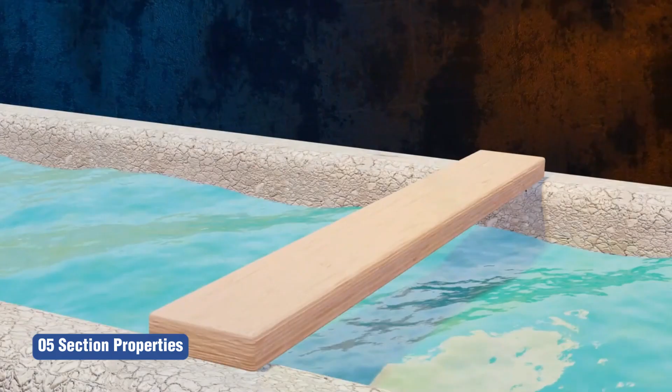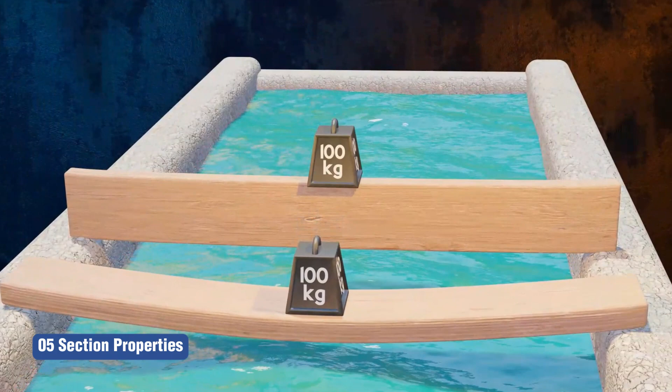When I am bending a beam like this, there's a lot of bending. But if I turn it 90 degrees and try to bend it now, it is not bending. Why is it that the same cross section is bending in one direction but not the other? This is due to second moment of area. In today's lecture, I will talk about second moment of area.

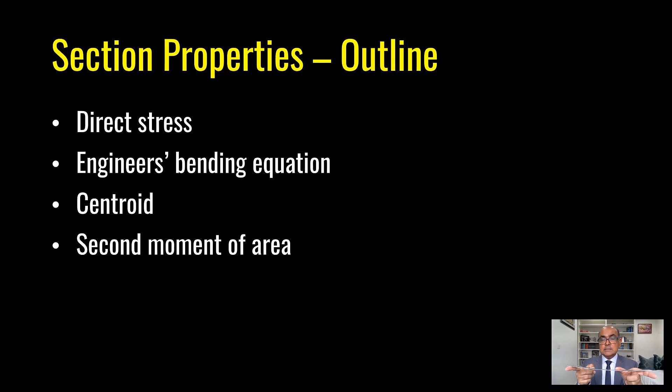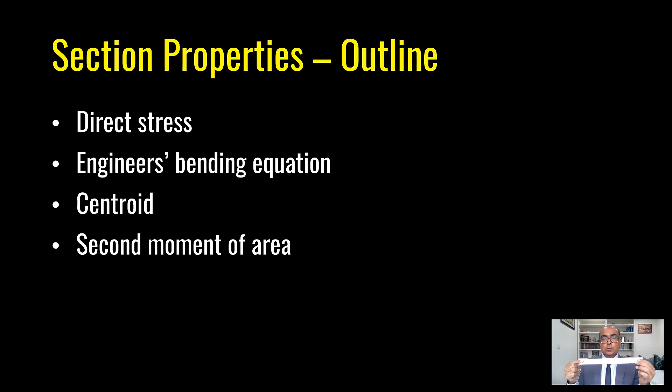If I'm bending a beam like this, in this position, you can see it is bending. But if I turn it 90 degrees and try to bend it, the cross-section is quite stiff. What causes that behavior? This is because of second moment of area.

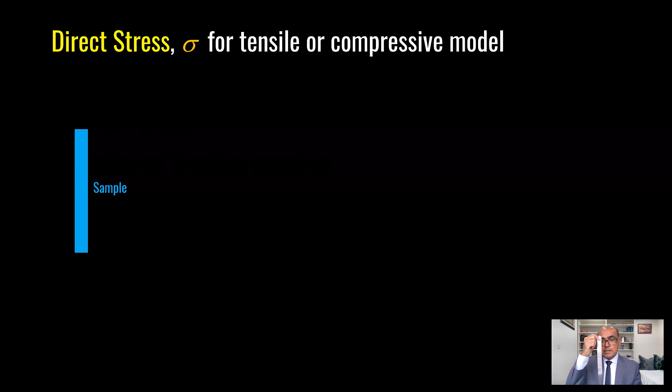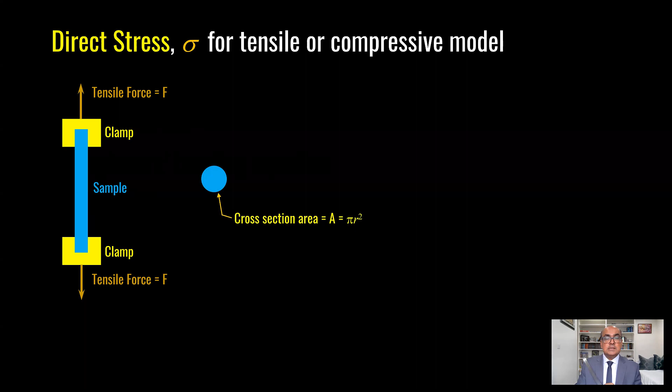First, direct stress for a tensile or compressive model. I have this sample, similar to this one. When you hold a bar or dog bone sample in a tensile testing machine and try to pull it, what happens? It is clamped at top and bottom, then we apply tensile force. This is the cross-sectional area of the bar, so cross-sectional area is pi r squared.

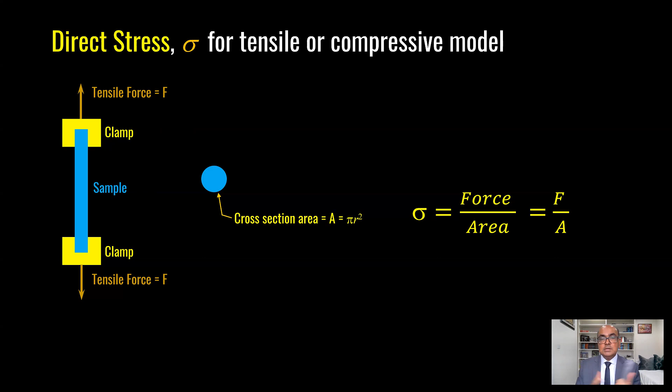Stress is equal to force over area. So whatever force we are applying, if we divide it by area, it will give us stress. If a material can sustain more stress, it means the material is very strong. For example, steel will take more stress, like 275 Newton per millimeter square. Concrete in compression will take about 30 Newton per millimeter square, but in tension it is very weak, taking only about 3 Newton per millimeter square. The unit, as mentioned, is Newton per millimeter square.

Now, how about if I have a beam? If I am bending an element, can I use the same formula, force over area, to find out the stress? The answer is no, because bending behavior is different to applying tension or compression. Most structural members are not subjected to direct tensile or compressive stress; instead, they are subjected to bending stresses.

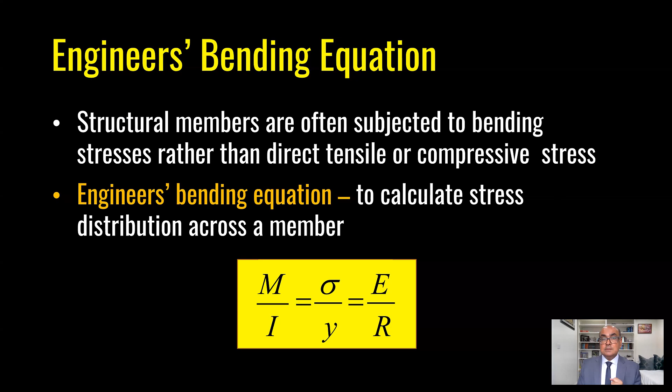The engineer's bending equation is used to work out stress distribution across the member, for the entire depth of the section. This is the flexural formula or engineer's bending equation, one of the single most important equations in civil, structural, and mechanical engineering. If you know this equation, you can pretty much design any system.

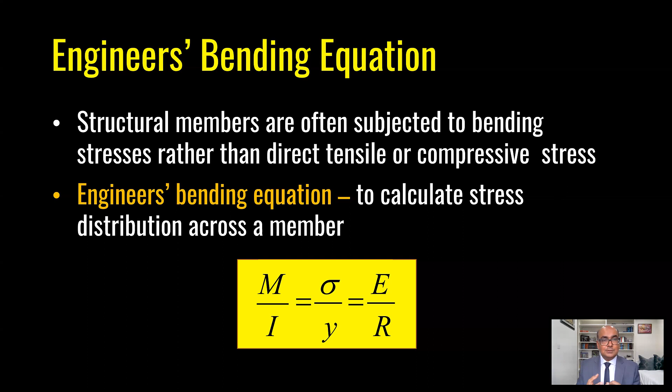It is M over I is equal to sigma over Y is equal to E over R. The question is what these terms are. We will see in a minute what they actually mean. The first is M, which is moment, with unit Newton into millimeter or kilonewton meter. It's normally taken as the maximum bending moment. When applying loading, if it is a point load, it will cause maximum bending moment.

I is second moment of area. It is a geometric property of the section and depends on the shape and its dimensions. Sigma is equal to stress, in Newton per millimeter square, worked out at a position of applied moment at any distance from the centroid of the section.

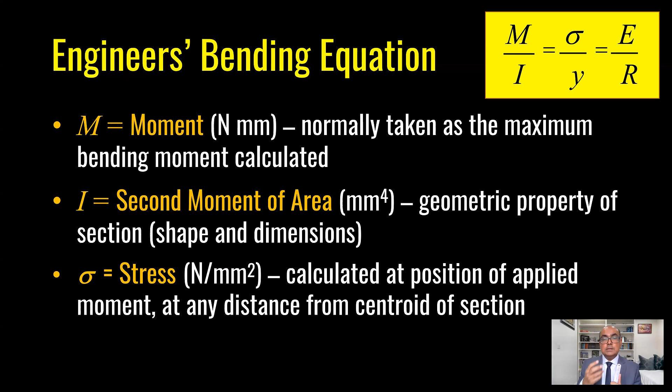So centroid is critical. For finding out stress, we need to find the centroid. Y is distance in the vertical direction, the distance from the centroid to the point where stress is to be found out.

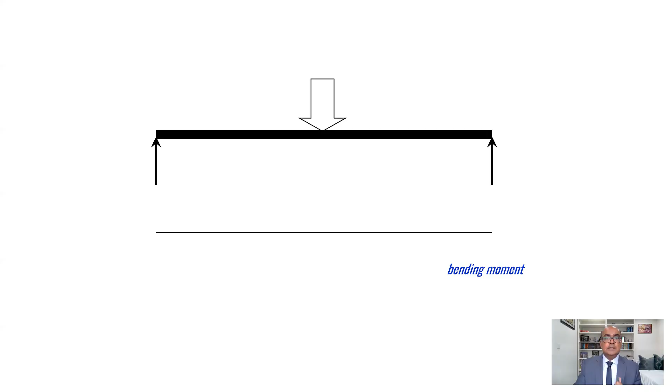For example, if I have this simply supported beam, and a central point load is applied to this beam, what will happen? What do you expect? If I have a beam and apply a point load, what will happen? Certainly it will bend. Let us see when load is applied, how the beam is bending.

Load is increased, you can see the beam is bending. Again I'm increasing the load, again increasing the load. You can see the beam is bending and the bending moment diagram is taking this shape.

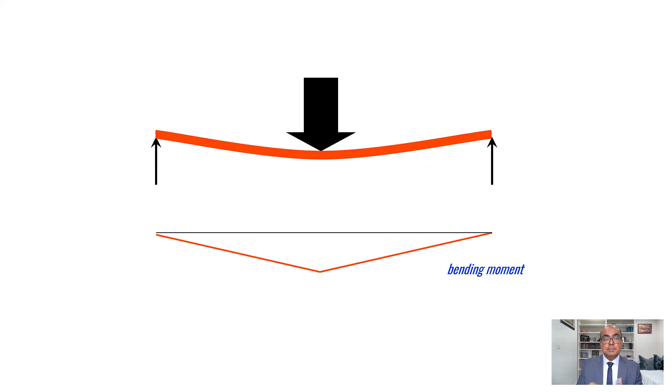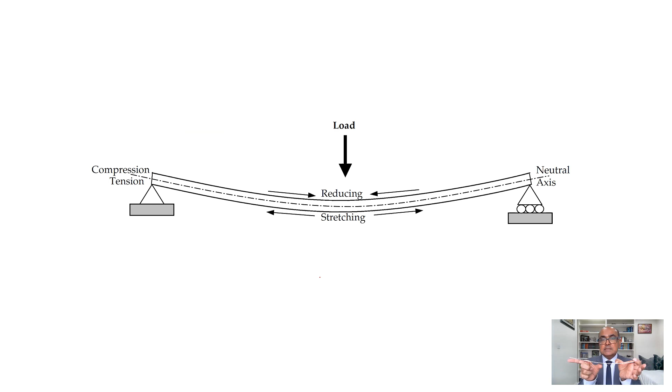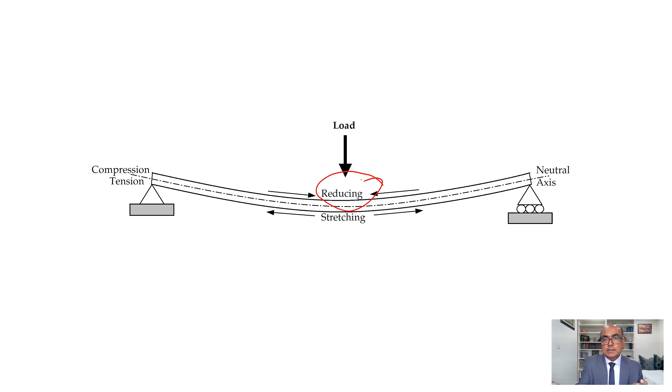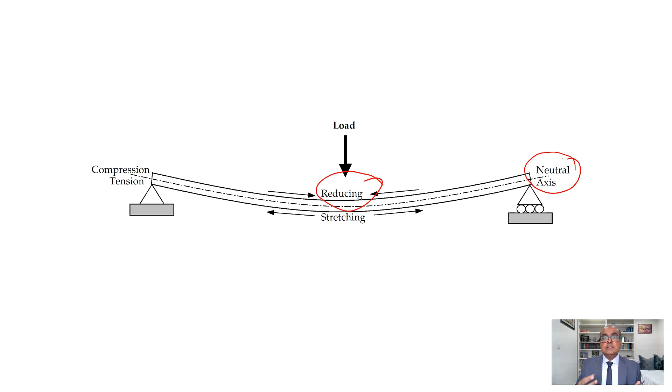In a sense, what is happening is that the bottom of the beam is stretching and the top of the beam is in compression, reducing in size. As you can see with these arrows, the top is compressing, the bottom is stretching. One other important thing is the neutral axis. Neutral axis is neutral, meaning it does not have tension or compression, so it does not have stress. Stress is zero at the neutral axis, and the neutral axis passes through the centroid of the section.

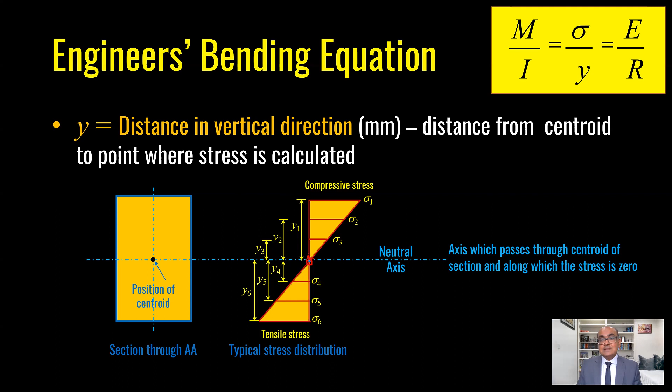Let's plot compressive stress at sigma 2, another location, y2 slightly less than y1, and let's plot sigma 5 on the tension side at y5. And then I have y3, sigma 3, y4, sigma 4. What do you think stress will be at the point where we have the centroid? It is going to be zero. So stress at this point is zero, and this point is termed as the neutral axis. The neutral axis is an axis which passes through the centroid of the section, at which the stress is zero. That's why we term it as the neutral axis.

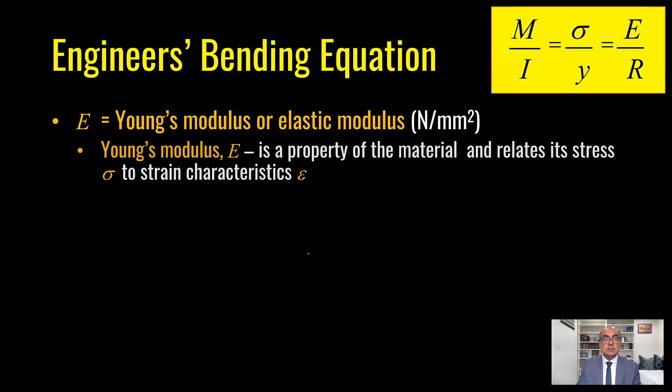E is Young's modulus or elastic modulus. Now, how do we determine Young's modulus? It is the material property and it relates stress to strain. Now, what is strain? Strain is a measure of deformation. In simple terms, strain is change in length per unit length.

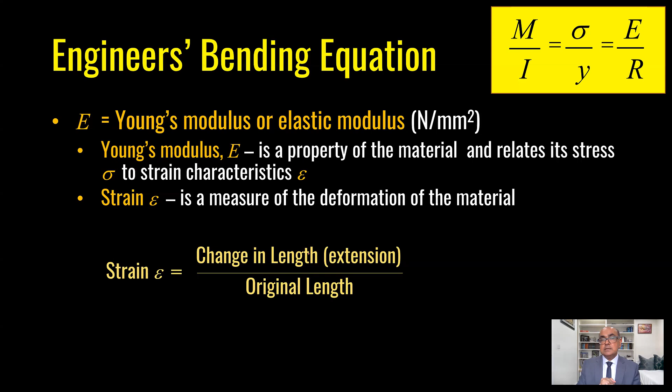Practically, we can determine Young's modulus. For very strong materials like steel, Young's modulus is high. For concrete, Young's modulus is low. Typical Young's modulus for steel is about 210 gigapascals, and for concrete it is about 30 gigapascals.

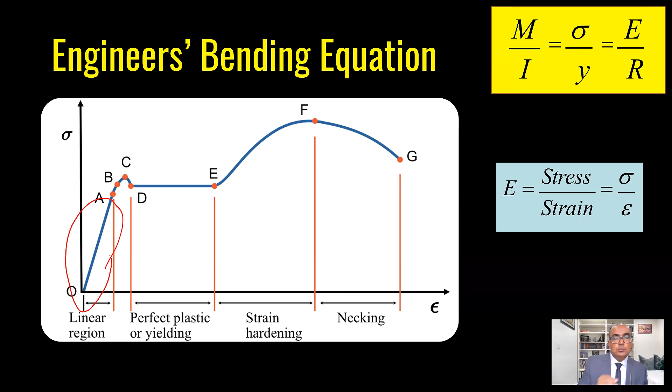E is stress over strain in the elastic range, so this is the linear region where we can find out E. R is the radius of curvature of the member under a specified loading. So if I have this member bending like this, this is simply R.

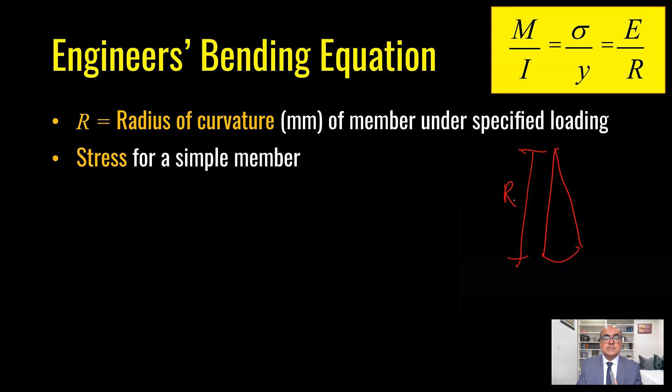For a simple member, stress is equal to My over I, because by cross multiplying I can bring this y over. Stress equals My over I, where M is moment, y is distance from the centroid to the top fiber or wherever you want the stress determined, and I is the second moment of area. The way I remember this formula is: my is me as well, I is me as well. That's how you remember it.

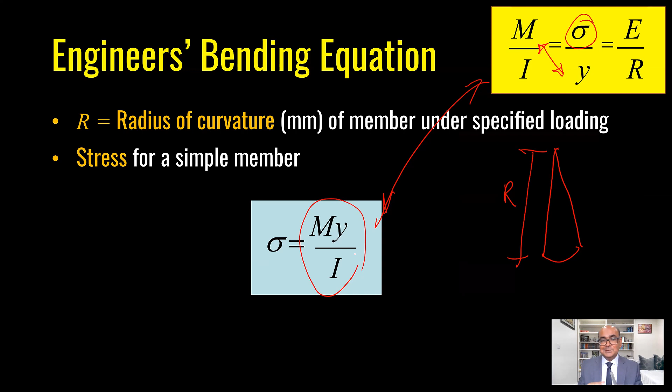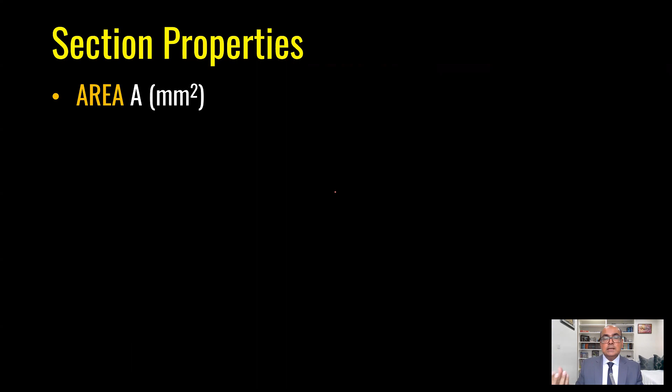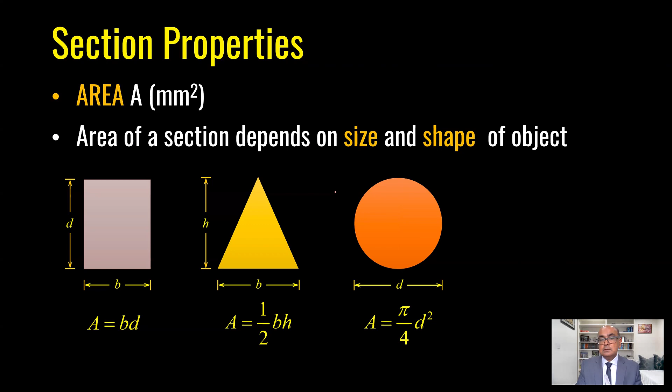Now, what section properties are we going to discuss? First is area, second is centroid, and third is second moment of area. Area is very simple—it depends on the size and shape of an object. For a rectangular object, simply multiply width by height. For a triangular object, it's half width into height. For a circular object, area equals pi over 4 d squared, or simply pi r squared.

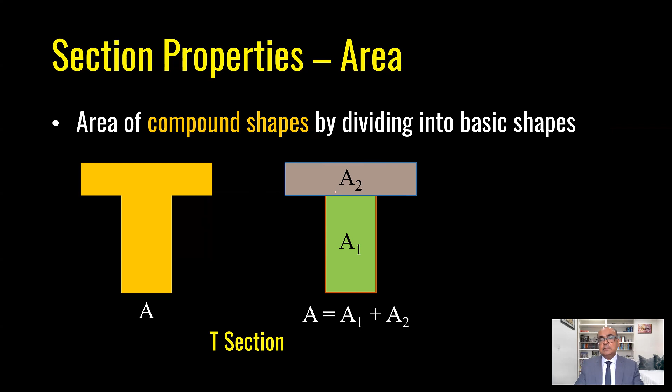Second is centroid. What does it mean by centroid? Centroid is simply center of area of the section. If a section is symmetric and simple, for example a rectangular section, it would be at its center, very simple to find out. But if a section is a compound section, a combination of different sections, then it's a bit difficult to find out.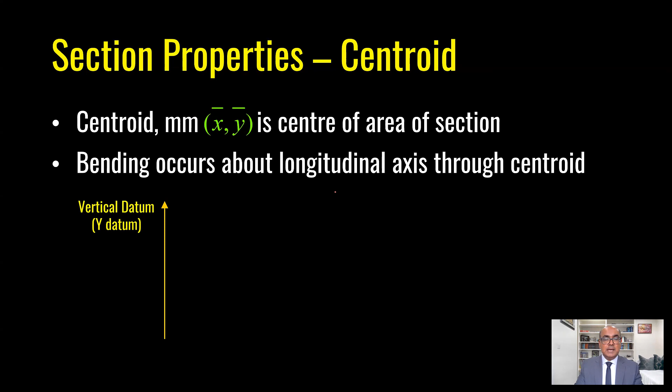Bending happens about the longitudinal axis through centroid. This is vertical datum axis or Y datum, and horizontal datum axis. We have a rectangular section, and the position of centroid would be at the center of the section.

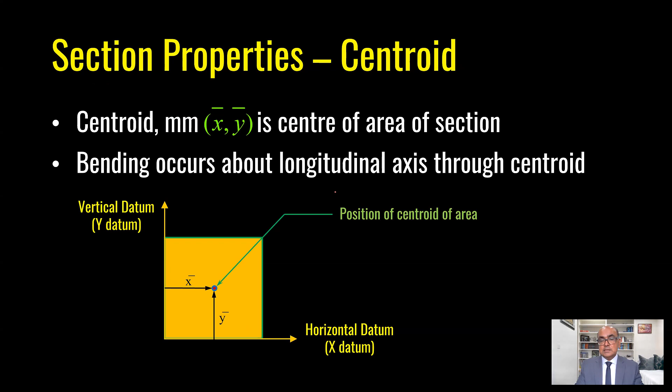Now, how to find out centroid if we have sections other than rectangular sections? For rectangular sections, in vertical direction we say d over 2, and in horizontal direction we say b over 2. For a circular section, again it is very simple: we simply say diameter divided by 2, or a radius, which gives us the center of the circle.

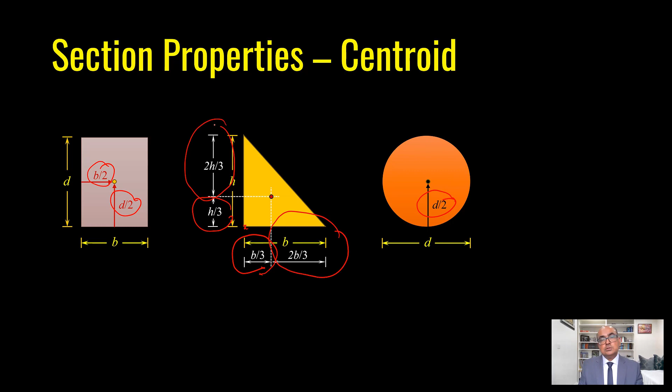But how about a triangular pattern? For a triangular pattern at the 90-degree point, you will see that it is b over 3, which is 1/3 of that dimension. At the longer side, you will have 2/3 of that dimension. So it's 2h over 3 at the top and 2b over 3 at the bottom.

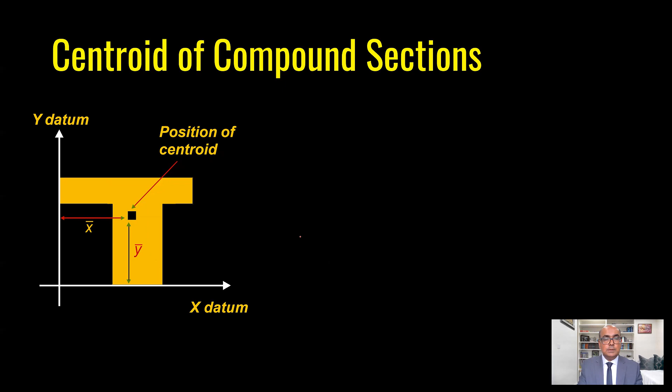Now, how to find out centroid of compound sections? We have this section where we have a Y datum and an X datum. We have this formula: x bar is equal to distance from Y datum to the centroid in horizontal direction, where y bar is distance from X datum to centroid in vertical direction.

So how do we find it out? We divide the element into a number of areas, find out the area of each element, and find its location from datum X and Y. For however many areas you have, you multiply each by its x and y, then divide by total area. That's how we work out x bar and y bar.

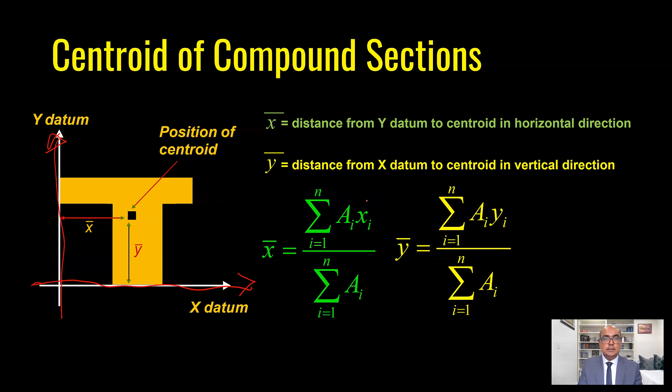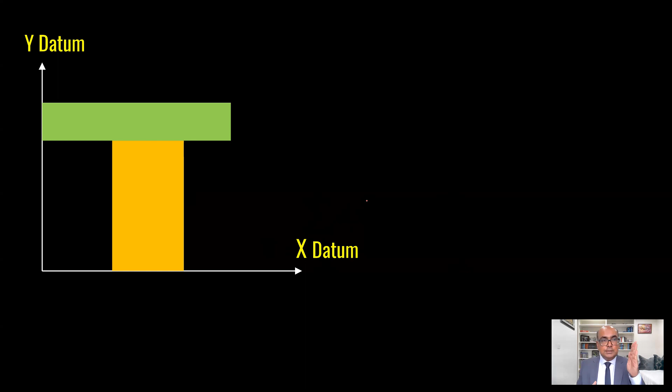For example, if you have this section, the first step is to find out the X and Y datums. The way I will do it is I take the extreme bottom point of the section and call it X datum, and the extreme left side of the section and call it Y datum. Now everything will be in reference to X and Y datum.

So first is centroid of part 1. I take half of the horizontal dimension and half of the vertical dimension, and find the distance from the center of this green rectangle to the X datum - that would be my Y1. From the center of A1, area 1, to the left point will be my X1.

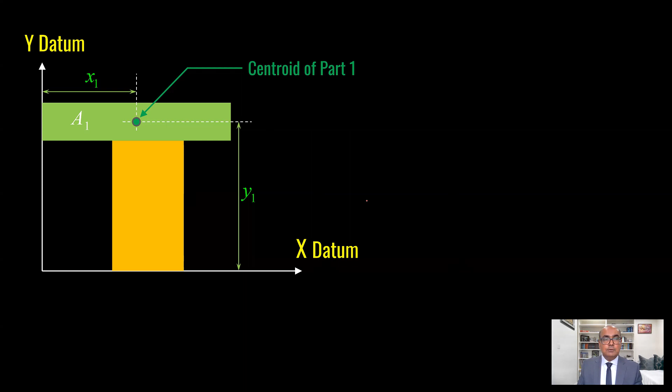Now area 2, this is the centroid of part 2. From the center of this point to the datum, I call it X2. From the center of this point to X datum, I call it Y2. Once I have X2, Y2, X1, Y1, then I can find out X bar and Y bar.

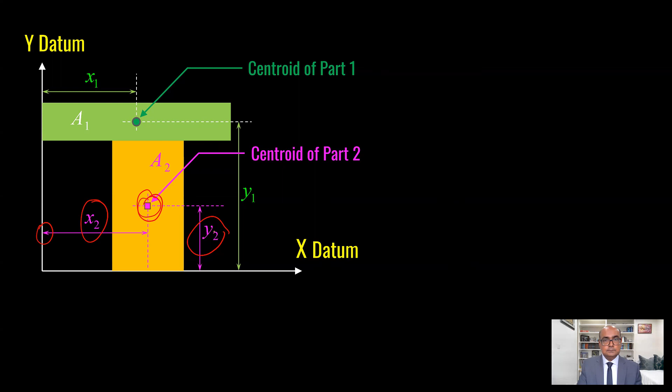Now this is the centroid of the compound section, which is here. How do we find it in formula? We multiply A1 with X1 and A2 with X2, divided by A1 and A2, and that gives us X bar. Similarly for Y bar, we multiply A1 with Y1, A2 with Y2, divided by A1 and A2.

Now it really depends on the number of areas. If you are dividing a compound section into 4 areas, then you will have A1,Y1, A2,Y2, A3,Y3, and A4,Y4, similarly divided by the 4 different areas. So it depends on the number of areas.

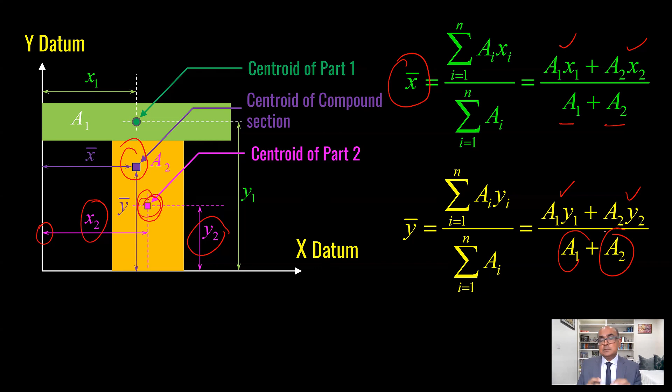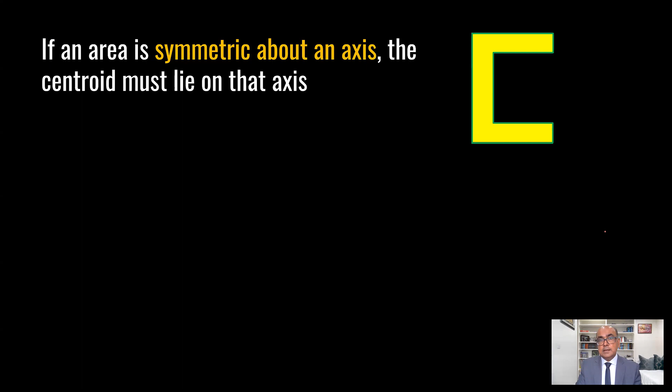If an area is symmetric about an axis, the centroid must lie on that axis. What does it mean? Take a channel section - is it symmetric in the Y direction or the X axis? I would say it's symmetric in the X axis, so the centroid lies on this X axis because it is symmetric in that direction. In the Y direction, it is not symmetric.

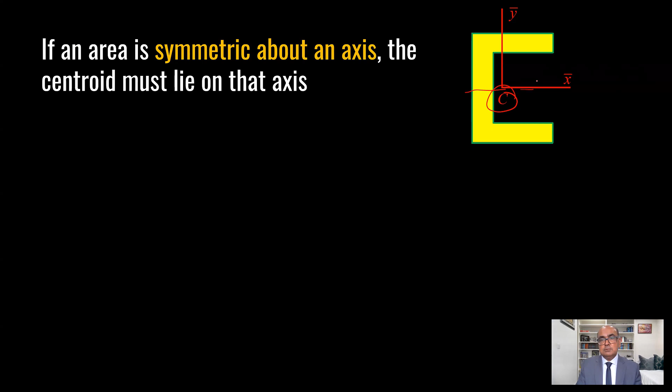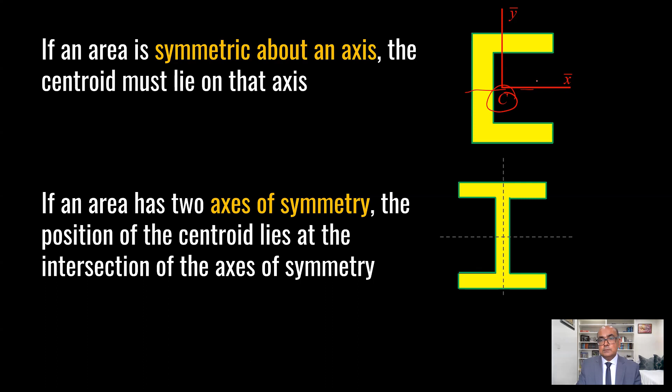If an area has two axes of symmetry, then the position of centroid lies at the intersection of the axes of symmetry. So here I have an I section, symmetric in the X and Y direction, and the centroid must lie at this point, which is the intersection of these two axes.

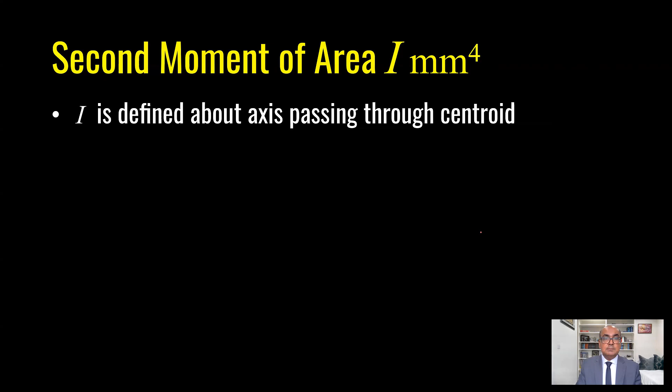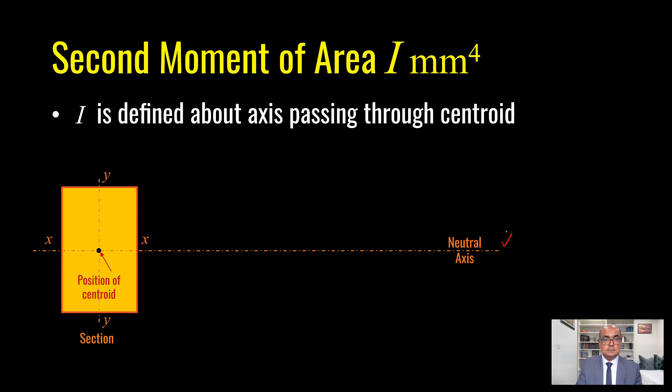Second moment of area: the unit for second moment of area is millimeter power 4. I is defined about the axis passing through the centroid. If I have this section, I have the X axis, I have the Y axis. This is the position of centroid, and this is my neutral axis. Load is applied to the section, and this is showing the elevation of the section.

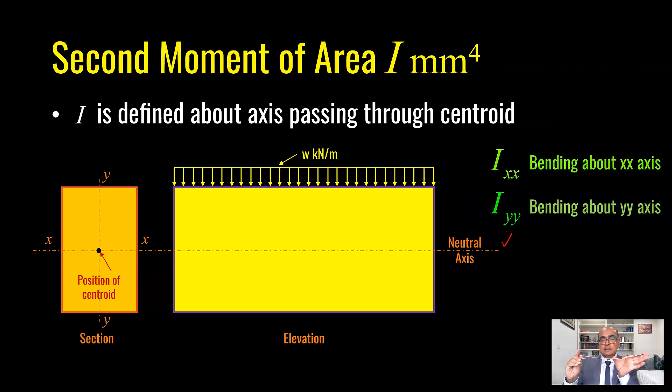IXX is bending about X axis. If I have this section, with this axis as X axis and vertical as Y axis, if I apply loading over here, this is bending about X axis. Bending about Y axis means if I turn it like this and apply load, Y axis is a minor axis here. Now you can see that it is bending quite a lot.

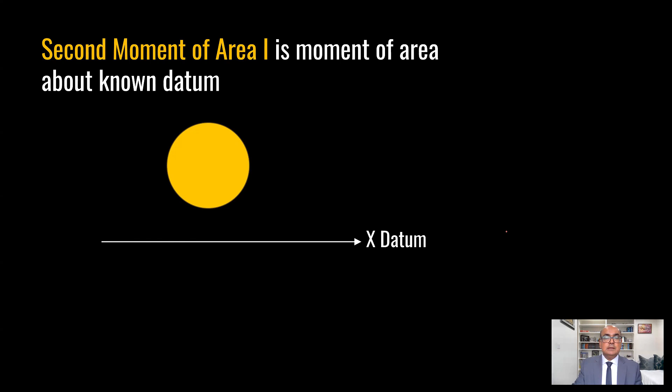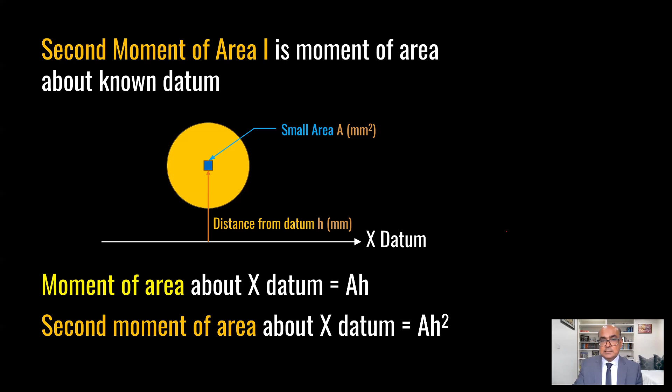Second moment of area is moment of area about a known datum. So if I have this element, I have X datum. This is a small area and it is at a distance of h from datum. I will say moment of area about X datum is A times h. Second moment of area about X datum will be A times h times h, which becomes A h square.

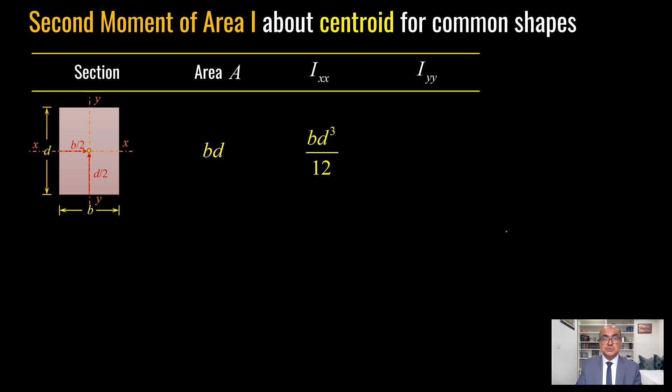Second moment of area I about centroid of most common shapes. If I have a simple rectangular section, X is passing through the centroid and Y is passing through the centroid as well. Area is B times D. IXX is BD cube over 12. This is the reason most beams have higher depth than their width, because when you have higher depth, second moment of area is more. When second moment of area is more, they have more bending capacity and less deflection.

To demonstrate this, I have this ruler. Depth is 20 millimeter and its width is about 2 millimeter, depth is quite high. In that way, when I'm trying to bend it, it's very difficult to bend. But if I turn it like this, now its width is 20, depth is 2 millimeter, and now it's bending really very easily.

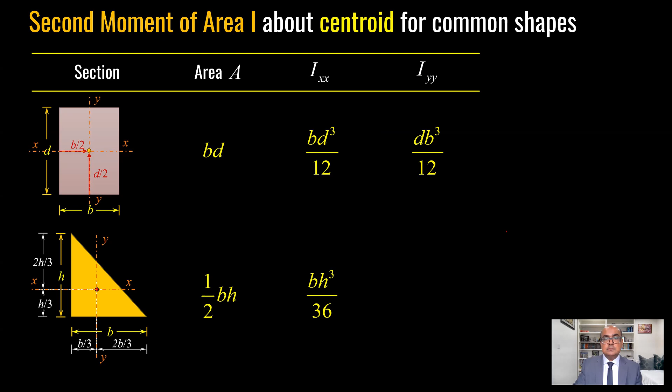How about triangular sections? Area is half BH, IXX is BH cube over 36, IYY is HB cube over 36. How about a circular section? For a circular section, with X and Y axes, area is pi over 4 d square or pi r square, IXX is pi d power 4 over 36, and IYY is same as IXX. Circular section is the most effective section because its major and minor axis second moment of area is same.

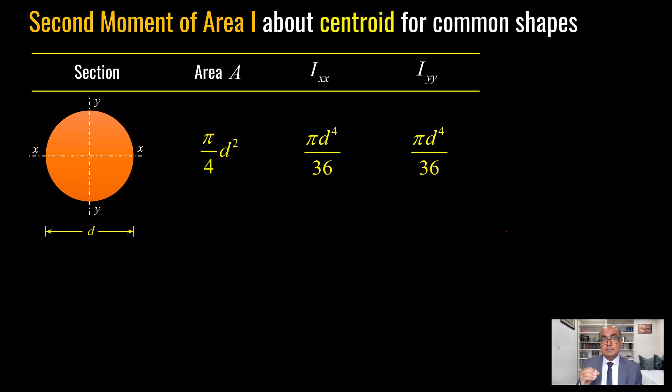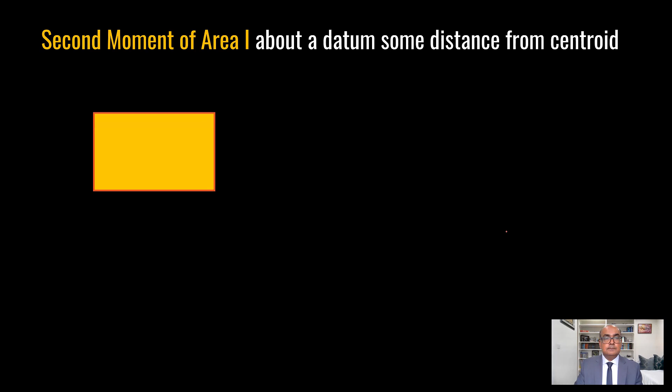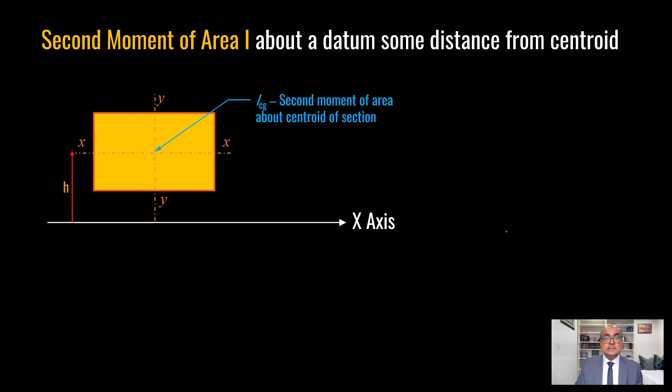Second moment of area about a datum at a distance from centroid. Now, how about if the datum is not passing through the centroid? In this case, I have x-axis and y-axis. The x-axis of the section is at a distance from my datum axis. ICG is the second moment of area about centroid of the section. I about datum axis, which is x-axis, is equal to ICG, which is second moment of area of the section, plus A h square.

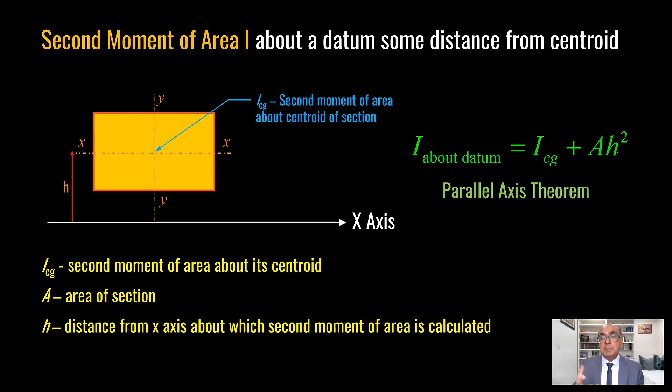ICG is second moment of area about its centroid. A is area of the section. H is distance from X about which second moment of area is calculated. This is termed as parallel axis theorem. When the datum axis does not lie at the centroidal axis, we use parallel axis theorem, or when we have compound sections, we utilize this parallel axis theorem.

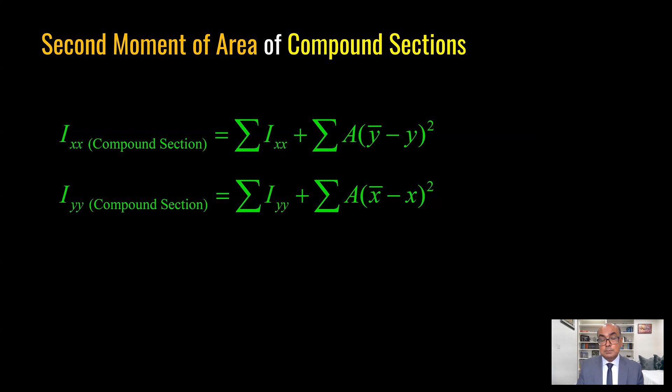Second moment of area of compound sections. IXX is equal to summation of individual IXX plus summation of A times (y bar minus y) squared, where y bar is the centroidal dimension and y is for a particular section. IYY, on the other hand, is equal to summation of IYY plus summation of A times (x bar minus x) squared. This is making use of parallel axis theorem. In a while, you will see how we use these formulas for compound sections.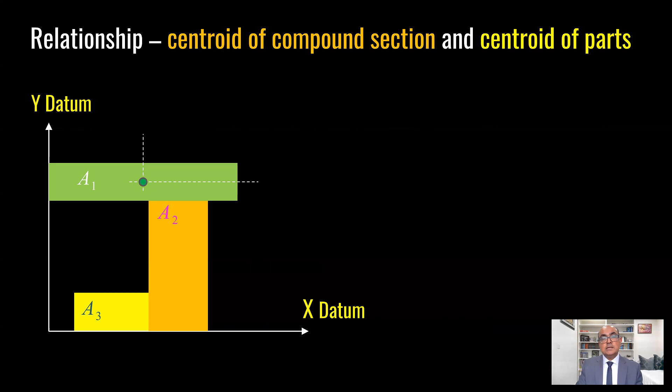For the first area, the center is X1 and Y1 away from the datum axes, and this is the centroid of part 1. For A2, the centroid is X2 and Y2 away from datum axes, termed centroid of part 2. For the third area, the centroid is X3 and Y3 away from datum axes, termed centroid of part 3.

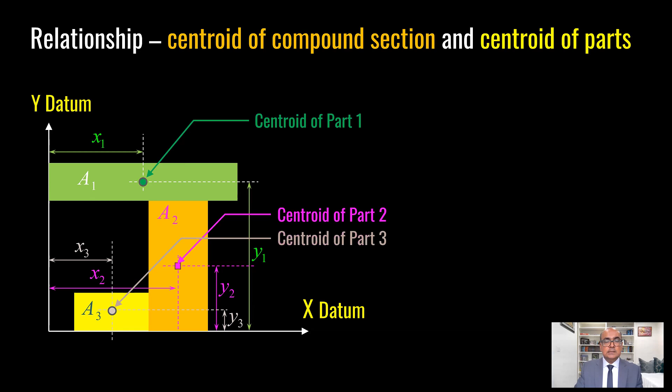Now, how about if we have to find IYY? In that case, we find X bar minus X1, where X bar is distance from centroid to the Y datum, and X1 is distance from center of A1 to Y datum. We repeat the process for A2 and A3 and we'll be able to find IYY.